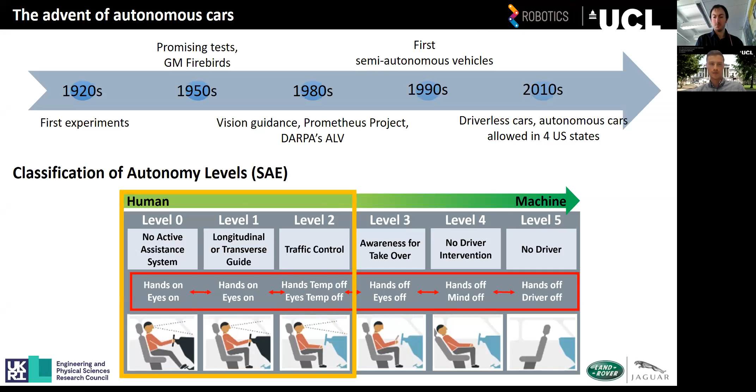First experiments involving autonomous vehicles began almost a century ago, and many predicted we would have fully autonomous cars on our streets by now—I'm referring to Rodney Brooks' plenary talk at ICRA 2020. Commercially available vehicles today have maximum level 2 autonomy, so the driver is required to take control occasionally between different levels of autonomy when needed to complete an end-to-end journey. These handovers between the car and driver cause safety concerns, as the driver might not be fully aware of the surrounding situation and the enabled autonomy features instantly, as recent incidents suggest.

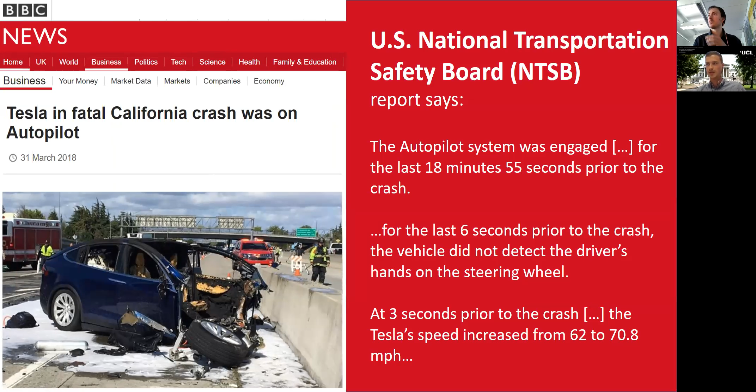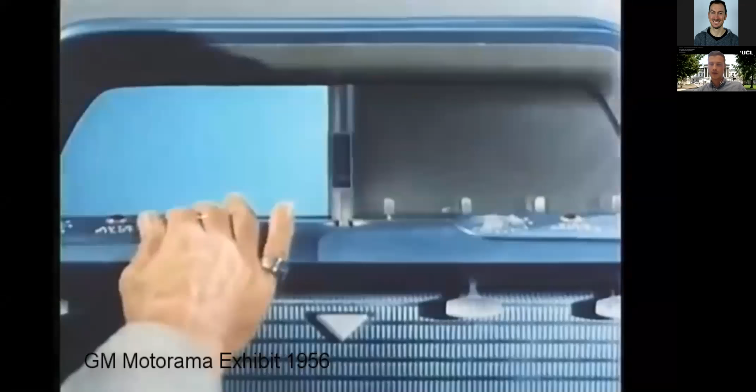We took inspiration from this video by General Motors from 1956. This was General Motors' vision on how the driver changes between manual control and full autonomy. Imagine that the man in the tower represents the artificial intelligence of the autonomous car here.

So the transition to the autonomy level is intuitive, human-centered, and safe. We propose a new interface designed for highly automated vehicles, measuring the situational awareness of the driver through physiological and behavioral sensors, giving appropriate feedback through a soft robotic driver seat acting as a co-pilot, and by that allowing safe, coordinated, and timely transitions between different levels of autonomy.

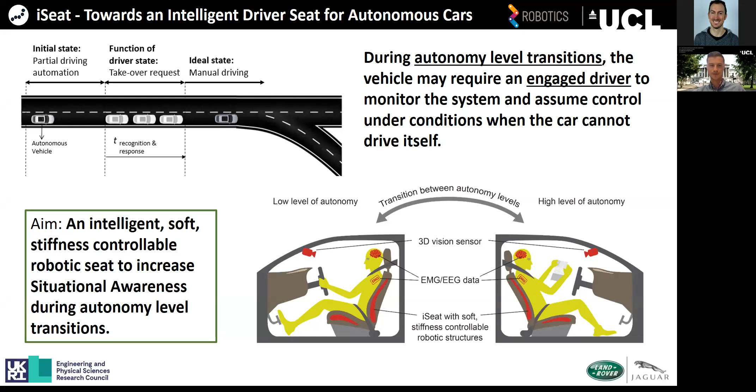An important aspect of the transition between autonomy levels is situational awareness—consolidating data into an understanding of the situation to achieve a safe and timely transition. Endsley differentiates the state of attention and defines situational awareness under 3 levels: perception, comprehension, and projection. Perception is about collecting critical data through the 5 senses. Comprehension is the traditional information processing, and projection is about prediction of future states of the decision-making process.

In order to measure situational awareness, we looked into identifying the correlation between situational awareness and EEG signals of the brain. The results demonstrate a positive correlation between the power spectrum of beta and gamma and situational awareness, as can be seen in the figure in the bottom right.

Beta is responsible for attention and alertness. Gamma is associated with cognitive functioning and information processing. As you can see in this figure, a strong activation of neurons in the left and right hemisphere is observed. These areas are responsible for vigilance and intuition, as well as logical and linear thinking.

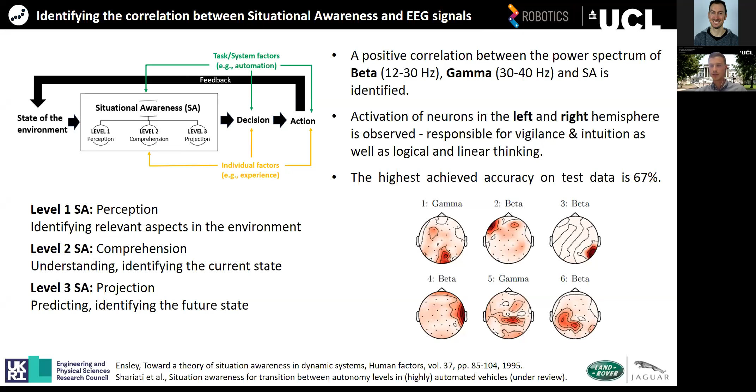To intuitively increase situational awareness, we are creating a soft robotic driver seat. This work includes the creation of a novel hybrid actuation system that allows simultaneous switching between pneumatic and hydraulic actuation to independently control position and stiffness of the seat.

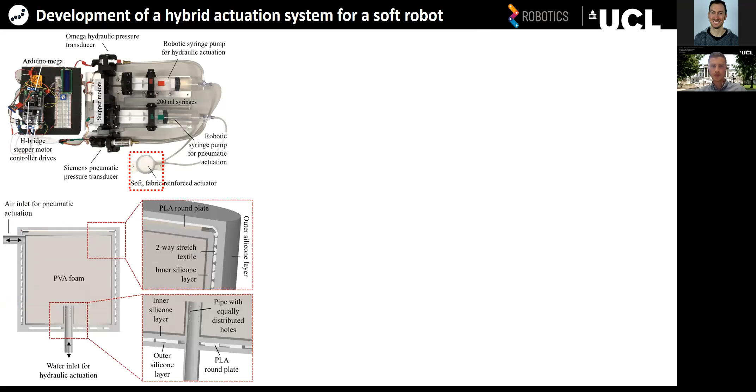I developed a soft robotic actuator with embedded pre-compressed foam and 2 inlets for water and air actuation. As you can see here, it is possible to either fully actuate the robot using water or air, a combination of both, or change the ratio of pneumatic and hydraulic actuation.

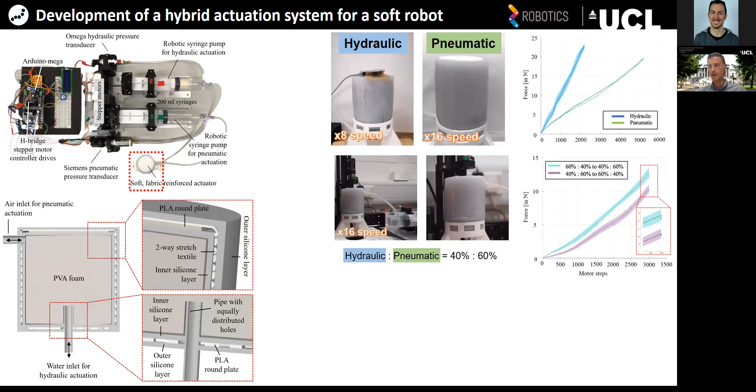Currently, we are integrating this work into a driver seat to prepare experiments in the Land Rover Jaguar driving simulator as soon as the situation at the moment lets us do that.

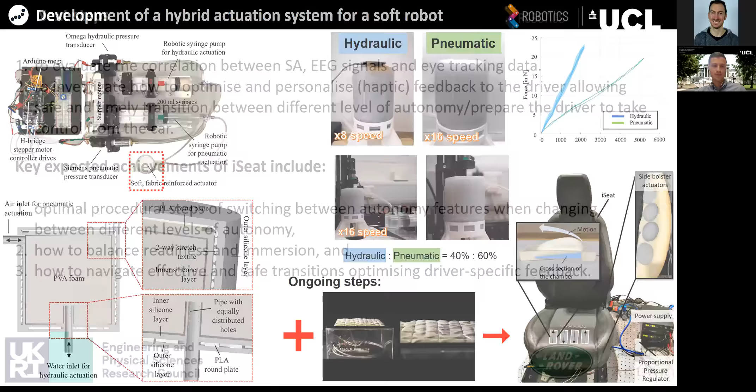Future work will explore how to detect situational awareness, the integration of more soft robots into our seat, and a number of experiments.

I'm Rahaf Rahal, and I'll be presenting our new method on haptic shared control for enhanced user comfort in robotic telemanipulation. Starting with the motivation behind our work, haptic shared control has been used a lot in the literature to share control of the system between a human and a robot component. It has been used, for example, to do different tasks such as guiding a user along a trajectory or to a desired point, or even away from undesired regions in the environment.

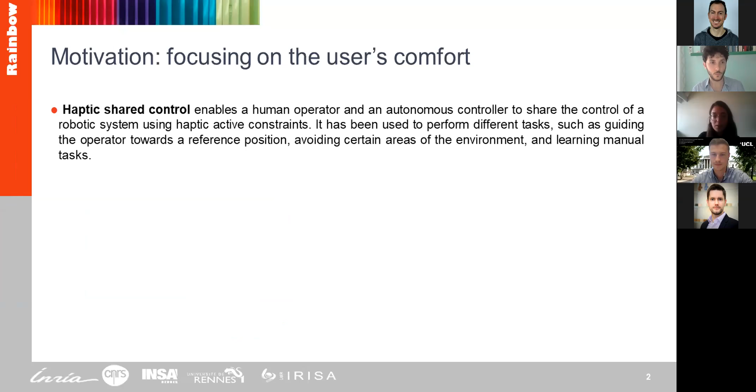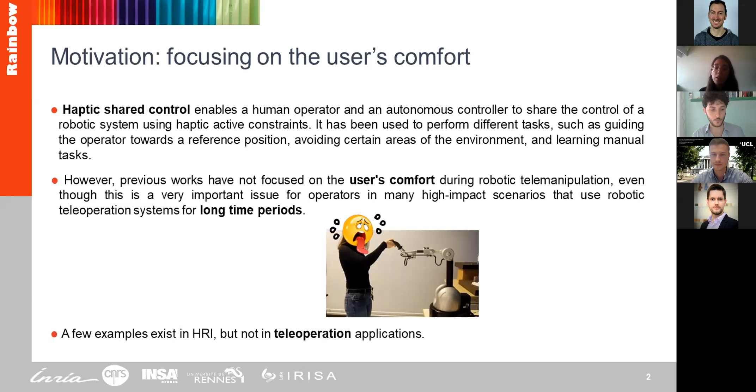However, none of the previous work focused on the user's comfort during telemanipulation, even though this is a very important issue in many applications that require long or repetitive tasks. A few works exist on the topic in the field of human-robot interaction, but not in teleoperation scenarios.

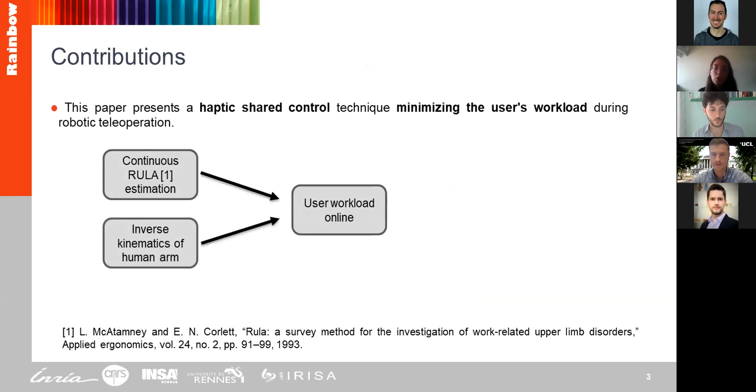Our main contribution in this paper is to present a haptic shared control technique that minimizes the user workload during robotic teleoperation. We start by devising a new online metric based on the RULA estimation, commonly used in ergonomics to estimate the human upper body's effort. Using this metric and an inverse kinematics implementation of the human arm, we can estimate the user workload online. This workload is then used, along with information about the task at hand, to generate haptic active constraints that guide the user towards accomplishing the task while minimizing the physical workload required.

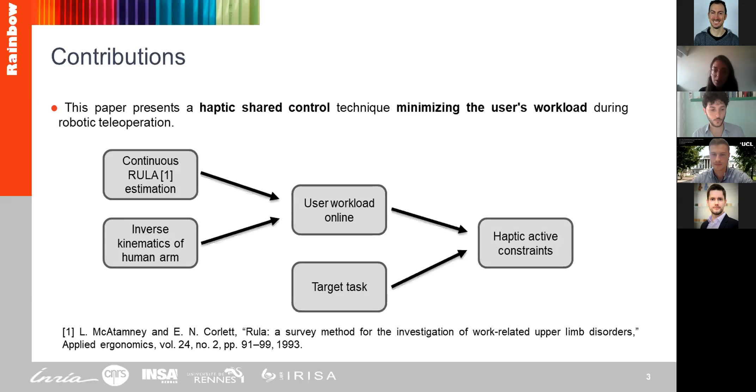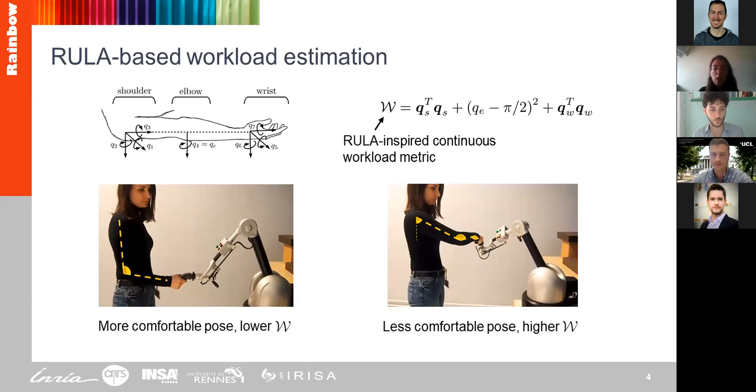To calculate the workload value in real time, we assume the user's shoulder is fixed, and that we know the pose of the wrist given the position of the master device. Using inverse kinematics, without any external sensor, we can estimate the arm angles and calculate the workload value, which is the deviation from the resting pose. For example, on the left you see a low value of W, comfortable for the user, and on the right, a less comfortable pose with a higher value of W.

The haptic feedback is designed as the weighted sum of two terms. The first, FW, minimizes the workload W. The second, FR, minimizes a task-related cost function—for example, the distance to the target or the deviation from a desired trajectory. In our work, we chose the distance to the target in a pick-and-place task as the representative cost function. Alpha and beta are weights designed depending on the task at hand; for example, for a long task requiring more user comfort, we can increase the value of alpha.

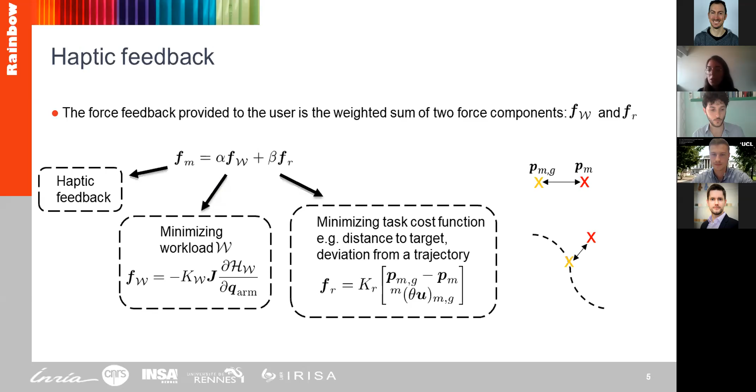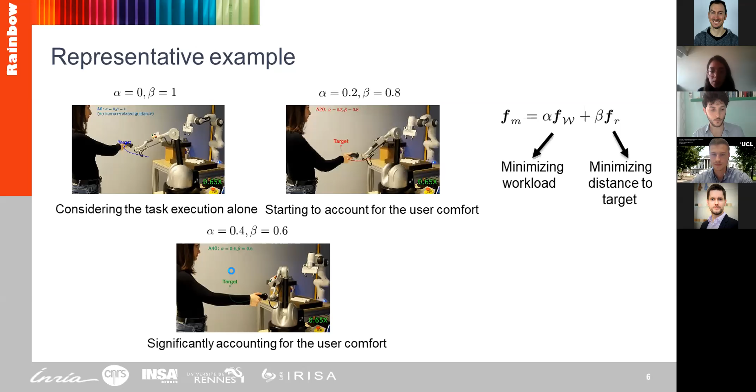I don't know why it's not playing. Okay, sorry about that.

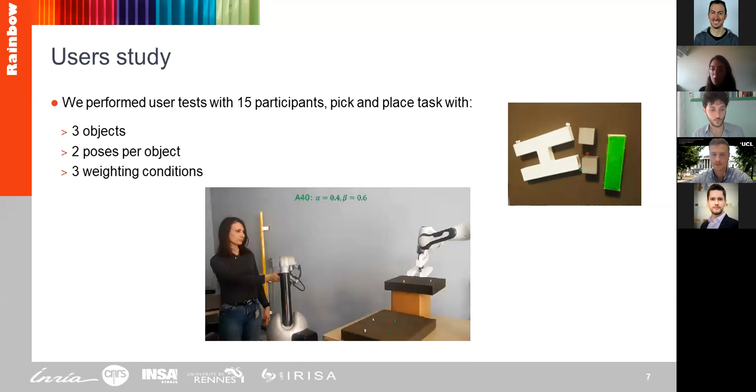The results showed that as we increase the human-related component in the haptic feedback, user comfort improves by 30%, as shown by the NASA TLX test results. But at the same time, we had a slight decrease in performance in terms of completion time and placing error.

As a summary, we presented a haptic shared control method that takes into consideration human comfort in robotic teleoperation, providing haptic feedback that accounts for both a human-related and a task-related cost function. Thank you for listening, and I'll be happy to take any questions.

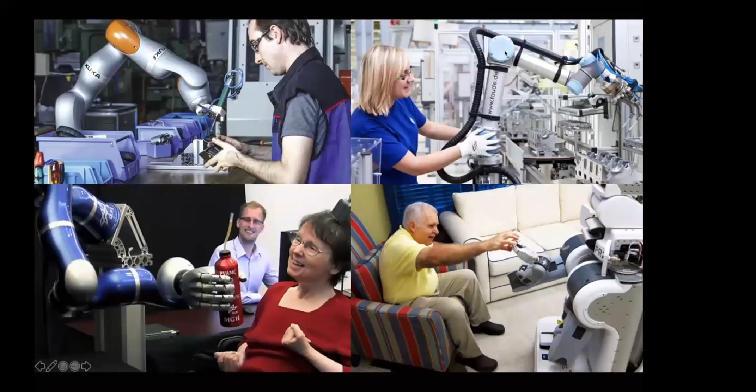Collaborative robots are designed to share workspace with humans, and they will physically interact with humans. Therefore, safety becomes a very important issue. We would like to develop safe and performant collaborative robots. Here we present a variable stiffness link to demonstrate this idea.

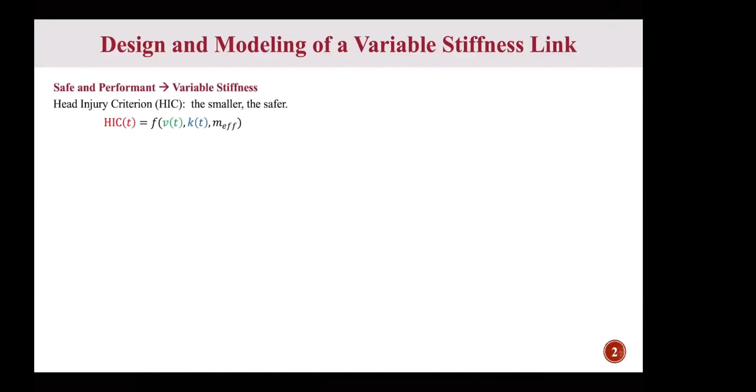We consider the head injury criterion to evaluate the potential impact results. The smaller the value, the safer. The HIC is affected by the impact velocity, the robot stiffness, and the effective mass of the robot.

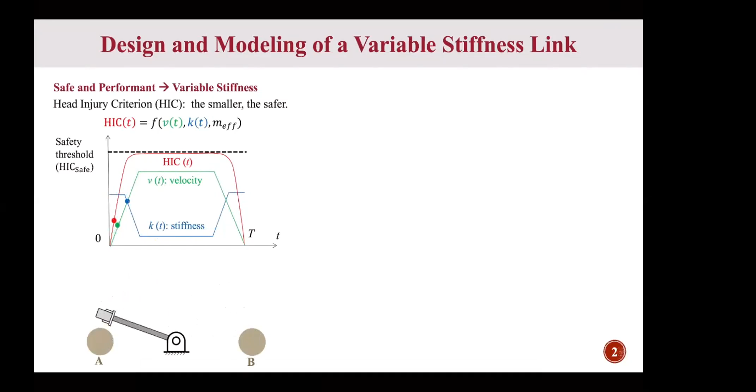Basically, we want to dynamically control the robot stiffness based on the robot velocity, such that the HIC value will be lower than a safety threshold.

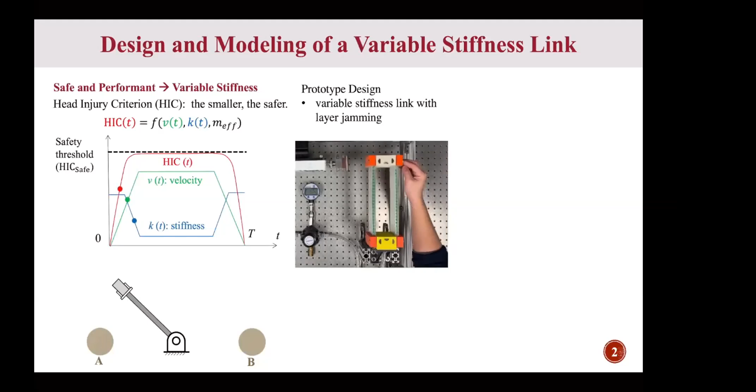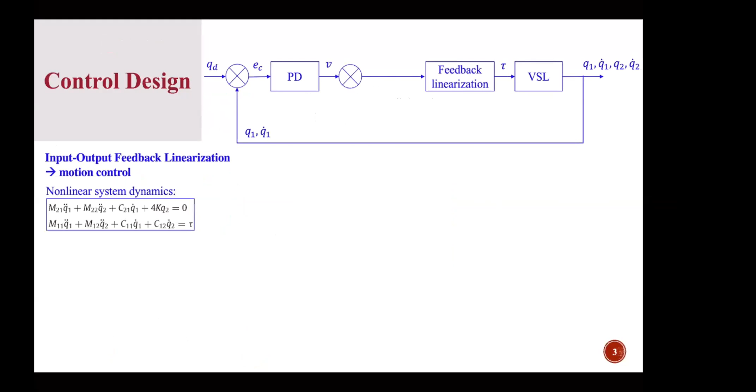We also developed a dynamic model of this link based on the pseudo-rigid body model. We developed a motion controller using input-output feedback linearization, and here is the nonlinear system dynamics based on the pseudo-rigid body model.

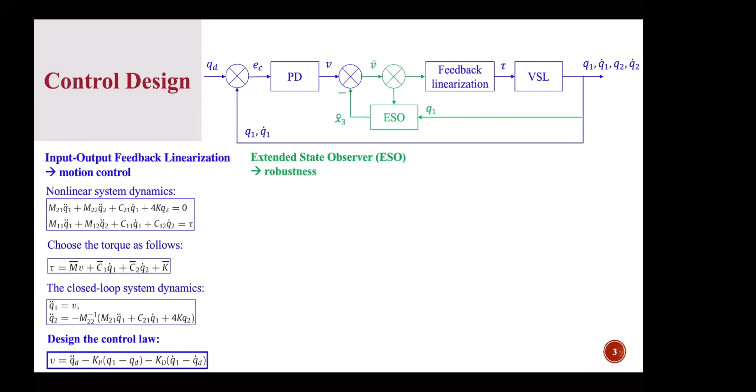To address the uncertainty, we propose to use the extended state observer. We extend the generalized disturbance to a new system state.

Then we can reformulate the output dynamics. To estimate the generalized disturbance, we design a linear ESO. Then we can update the control law.

Since this is a compliant link, we also need to address the vibration. We propose to use deflection feedback to address the vibration problem. We assume this is a singular perturbation problem.

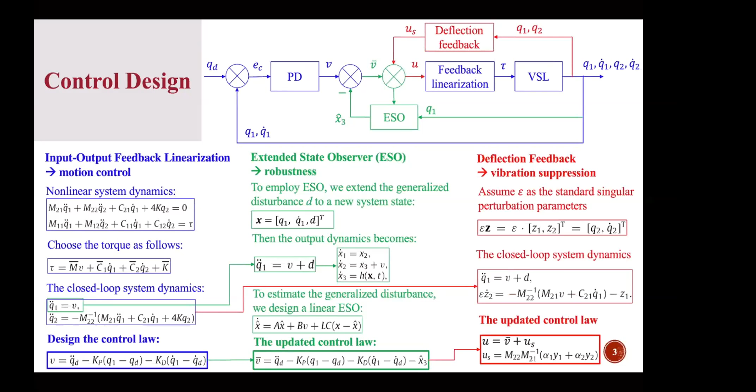Then we can reformulate the closed loop system dynamics, and then update the control law. The final control law will address the motion tracking, the robustness, and vibration suppression simultaneously.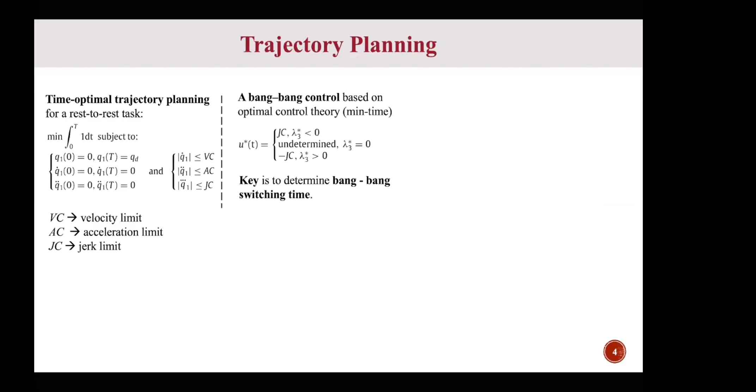We consider a rest-to-rest task for the trajectory planning problem. Here we want to minimize the time, and with these boundary conditions and constraints, it is a bang-bang control problem based on optimal control theory. The key is to determine the bang-bang switching time.

Different constraint combinations will yield four potential canonical profiles with an analytical solution of the acceleration and velocity. If we consider a particular case, we will know the boundary condition, and this boundary condition will determine which canonical form will be used for this particular case. Then we can integrate with these boundary conditions to offer an optimal trajectory.

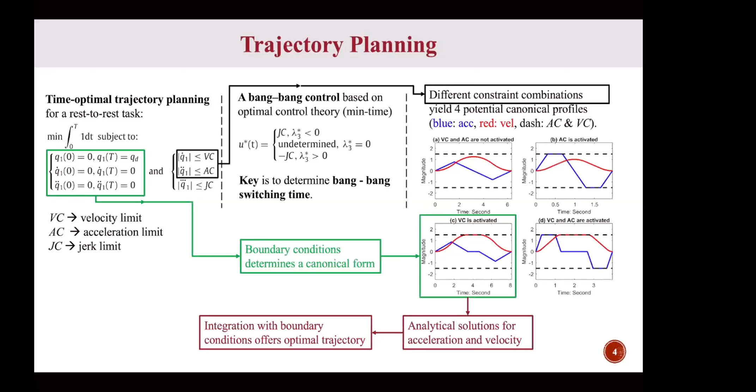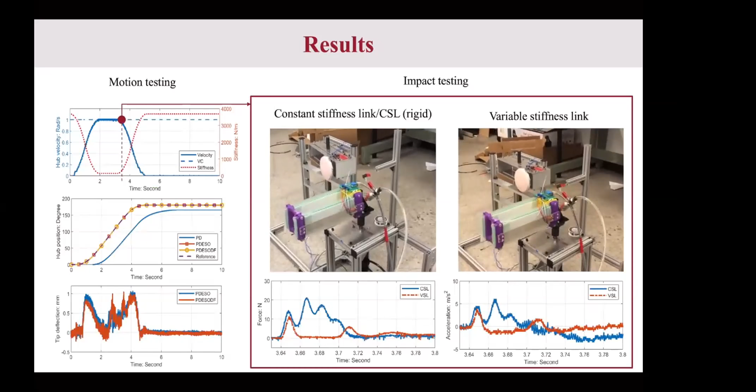For the impact testing, the left one shows the constant stiffness link, the right one shows the variable stiffness link. It turns out the variable stiffness link produces a smaller impact force and a smaller HIC value.

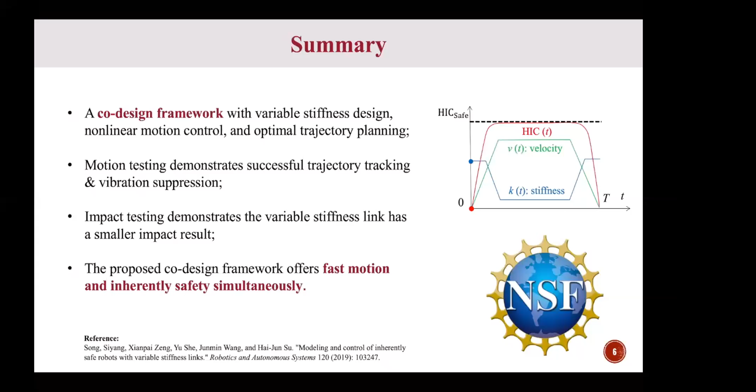To summarize, this work presents a co-design framework with variable stiffness design, nonlinear motion control, and optimal trajectory planning. The motion testing demonstrates successful trajectory tracking and vibration suppression. The impact testing demonstrated the variable stiffness link has a smaller impact result. This proposed co-design framework offers fast motion and inherent safety simultaneously. Thank you.

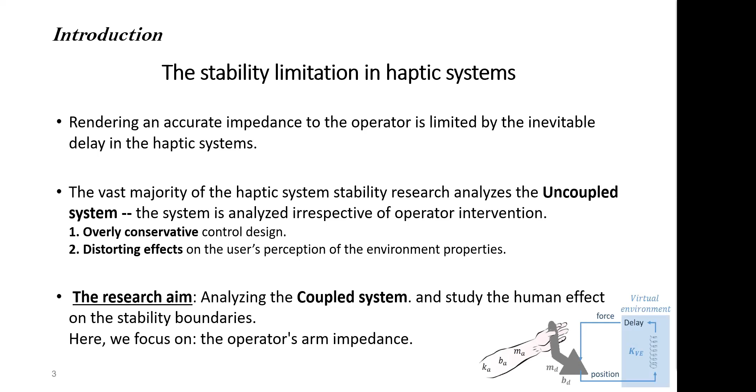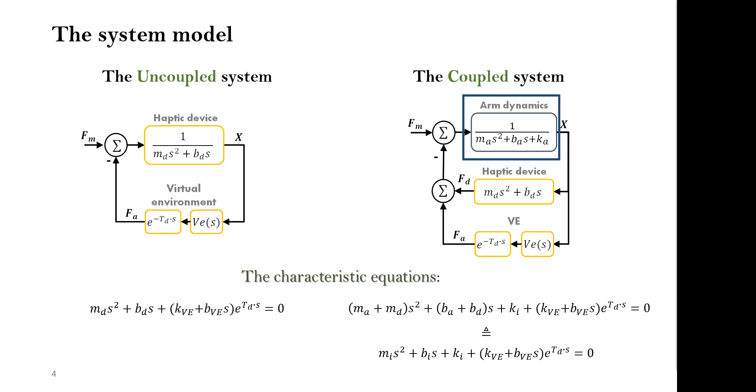The muscles produce force to move the arm, which is described by inertia, damper, and stiffness components. The arm holds the haptic device, and its movement is translated into movement in the virtual environment. As a result of this interaction, the haptic system applies forces back on the arm.

We analyze the stability boundaries using the frequency sweeping method, which reduces the tracking of an infinite number of roots to the tracking of only the rightmost roots.

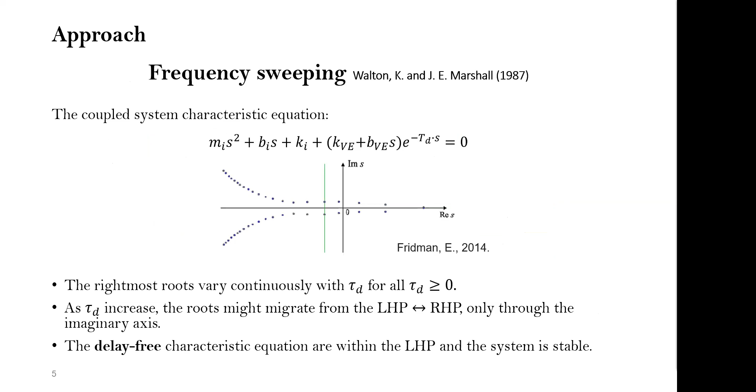The rightmost roots vary continuously with the increase of the delay. When the delay increases, the roots might migrate from the left half plane to the right half plane and vice versa, only through the imaginary axis. Note that because all the coefficients are positive, the two roots of the delay-free version are within the left half plane and the system is stable.

This leaves us with three optional stability conditions when the delay increases, depending on the number of crossover frequencies, which are the positive real solutions of the equation. When there are no positive real solutions, no imaginary axis crossing can take place for any delay, meaning the system is delay-independent stable. Where there is one positive real solution, the roots stay in the left half plane until a certain delay value, from which the roots cross to the right half plane.

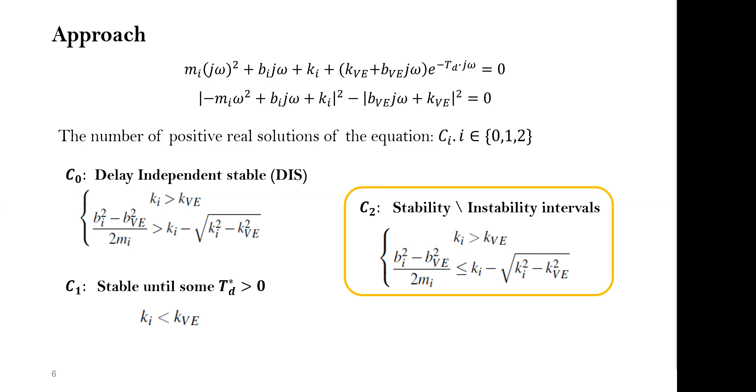And when there are double positive real solutions, the roots are in the left of the plane until some first crossing delay, but now they might cross again back to the left of the plane with a higher delay, meaning the system can become stable again within higher delays.

So we move to the results. Here we can see the stable delay boundaries of the uncoupled versus the coupled system, depending on the virtual stiffness, or in short, KVE. Since the arm's impedance is much higher than the haptic device impedance, the boundaries of the delay in the coupled system are much wider.

Moreover, we see that there is a range of KVE values for which the system is delay-independent stable, and also a range in which we get the possibility of stability and instability sequences. This means that, for example, for KVE equal to 270, the system stays stable until a delay of 100 milliseconds. But if the delay in our system is higher than that, let's say equal to 200 milliseconds, we might get an advantage from artificially increasing the delay in the system to a value somewhere between this range.

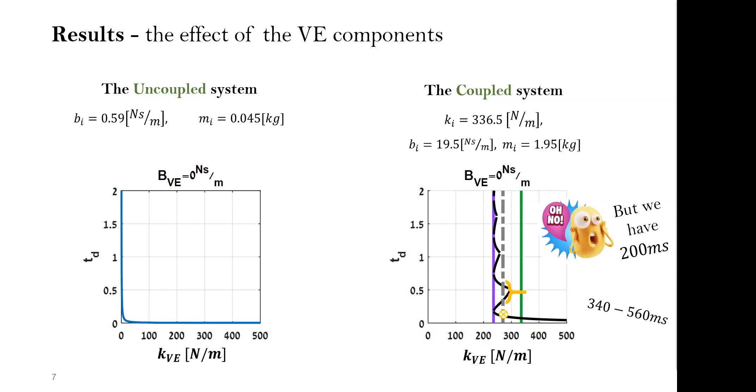Thus returning it to a stable regime. In addition, it is also worthwhile to understand the boundaries' dependency on each impedance component. So here, for example, we're examining how changes in the arm's damping and stiffness affect the first delay value at which the system becomes unstable. The more yellow the color, the greater the range of delay in which the roots do not cross the imaginary axis and become unstable. The white area represents the delay-independent stable regimes, and note that here we are assuming the mass of the arm equal to 2 kilograms.

We continue with this analysis examining the effect of other arm parameters. In the second and third graphs, we examine the effect of arm's mass and stiffness, and in the fourth graph, we examine the effect of the arm's damping and mass. From here, we can conclude that in the virtual damping-free case, in order to increase the range of stable delays, we prefer high stiffness and damping, but low mass.

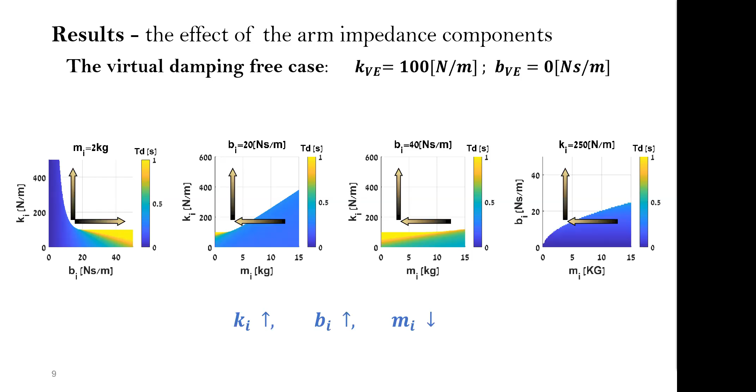When adding to the virtual environment a damping component, we will again prefer high damping of the arm, but our preference for the arm's mass and stiffness depends on the difference between the virtual damping versus the arm damping. So when the arm damping is lower than the virtual damping, we prefer low stiffness and high mass, and vice versa.

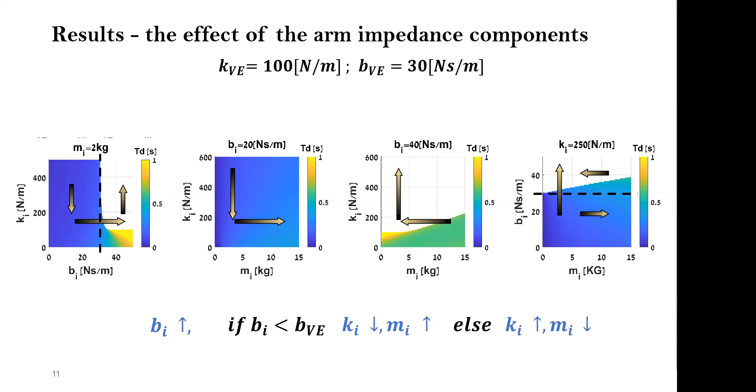And let's conclude. Analyzing the coupled system reveals much broader boundaries and reflects more truthfully the stability results found in the previous experiments. By analyzing the stability based on the frequency sweeping method, we could identify conditions where the haptic system could be delay-independent stable or could be stabilized by an artificial increase of the delay.

In addition, in environments known to us as soft environments, such as the soft tissue of the patient's body, the system can be stable even in the presence of high delays and with an operator with relatively low impedance values. So thank you for listening.

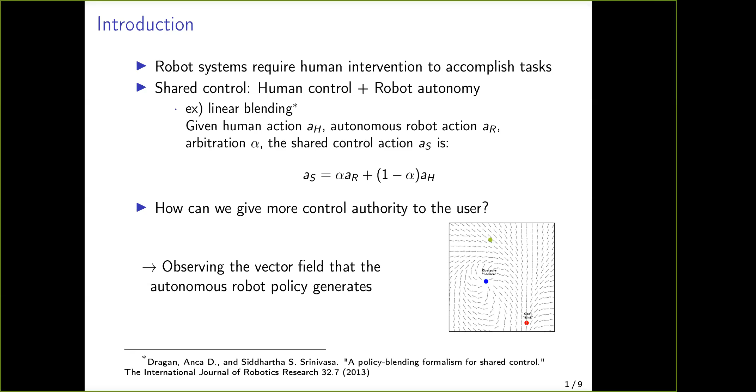We start by formulating shared control as an optimization problem. The shared control action is chosen to maximize the user's internal action value function while keeping a proximity condition that keeps the shared policy close to the autonomous policy.

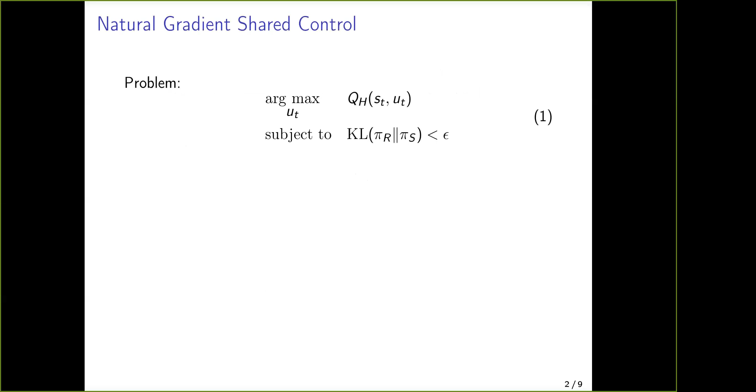We assume a linear approximation over the objective and quadratic approximation of the KL divergence. This leads to a new control paradigm for shared control using natural gradient ascent. The state of the shared control system is updated using the previous state plus the inverse Fisher matrix times the gradient of the action value function with respect to the state, scaled by the step size eta.

Modeling the user's internal action function is challenging. Thus, we utilize the user's action as an estimate of the gradient of the Q function.

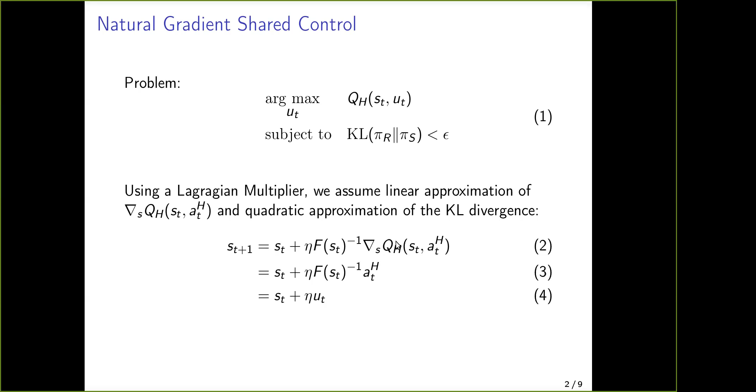Now, you might wonder how the Fisher information comes in. The Fisher information matrix, by definition, measures the expectation of the overall sensitivity of a probability distribution to changes of a parameter theta. The Fisher information is the second order derivative of the KL divergence, which emerges by solving the optimization problem using quadratic approximation.

In our setting, the Fisher matrix expresses the sensitivity of the policy probability distribution to small perturbations of the state. We estimate this to be the second order Hessian of the action value function.

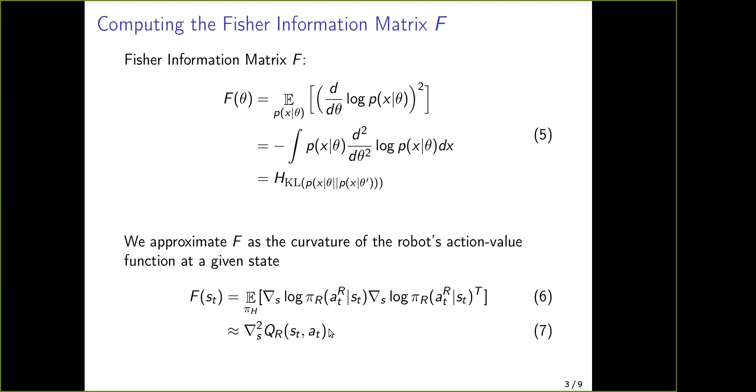As we consider actions as an approximation of the first derivative of the action value function, the Jacobians of the actions become the Hessian of the action value function. Thus, to compute the second order derivative of the action value function, we use the first order derivative of the actions using the finite difference method.

We represent the global robot policy using a neural network that can be regressed over the whole state. This can be easily queried using the trained network.

For a pick and place task, we display the ellipses represented using eigenvalues and eigenvectors of the inverse Fisher matrix. The ellipses represent the directions that the user action is stretched along. The user has more control authority over the system where the ellipses are more circular, and when the ellipses are stretched, the robot takes control.

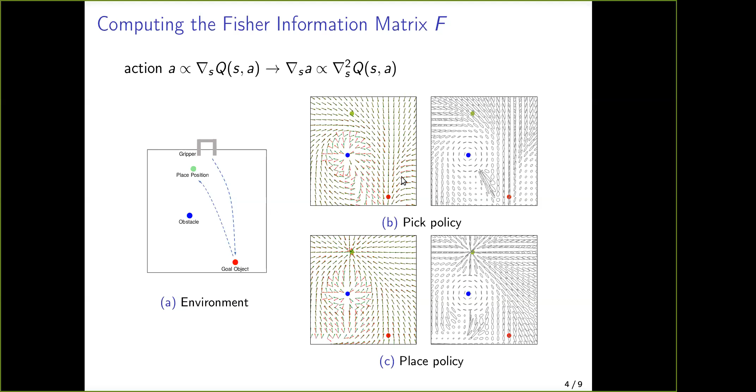We can provide different levels of assistance depending on the cost function that the robot policy optimizes. In the case of multiple goals, we compute the inverse Fisher matrix as a weighted sum over the beliefs. When the intent is not clear, for instance in these regions, the robot transfers the control authority to the user.

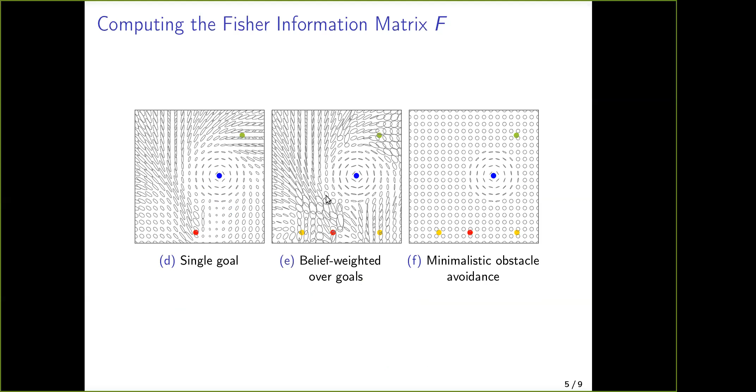We define a teleoperation task to assess the efficacy of our method, where the user controls the robot arm to perform pick and place tasks using the joystick. We hypothesize that our paradigm allows the user to take more control during the task while ensuring safety and efficiency.

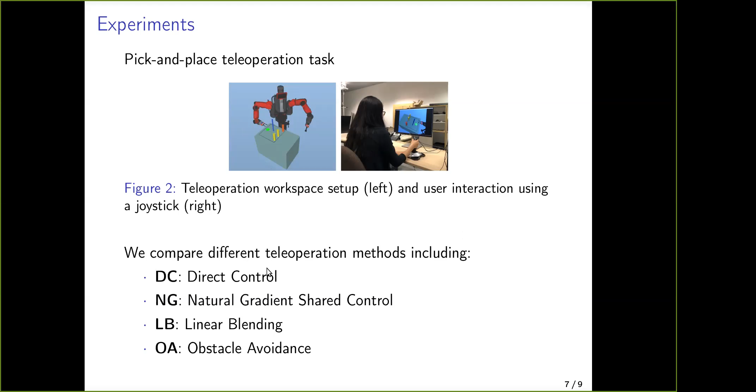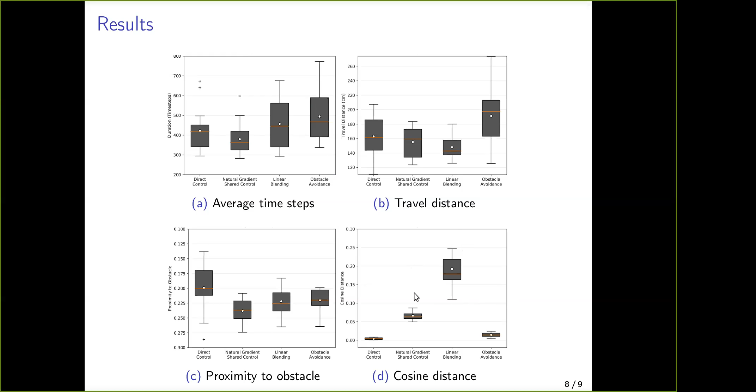We compare our method with different control methods including direct control and linear blending. Our preliminary results from 16 users show significant improvement over other control methods, and our method was still able to maintain user control while being compliant with user commands. This is shown especially when comparing the cosine distance between the user commands and the actual shared control commands.

We believe that our results are convincing towards a better user experience, and we plan to investigate more about this in our future work. Thank you very much for listening.

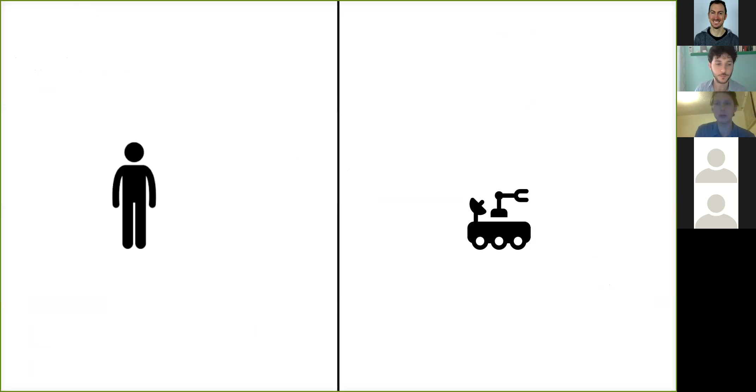To flesh out this idea, let's consider a user operating a robot remotely. The user is sending commands to the robot from some remote location here on the left, and the robot obeys those commands in its environment over on the right. Because the user is remote, they don't have access to the robot's environment directly. Instead, their knowledge of the environment is based on their perspective, given to them by some sort of control interface, represented here on the left.

So often this user perspective is going to be something like the video feed from a camera mounted on the robot. The user watches this video feed and makes decisions about what actions to take according to that.

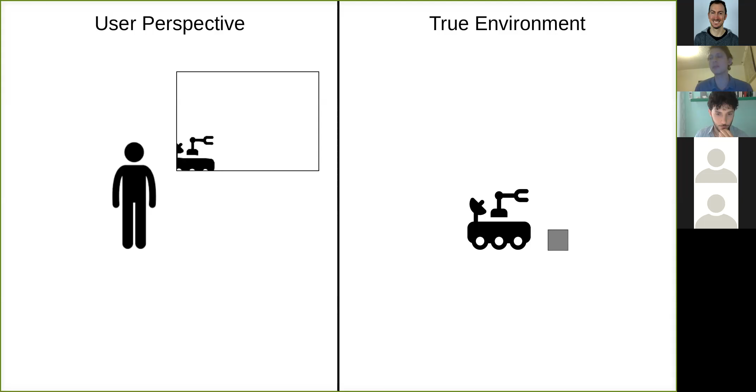However, what if there's limitations in what the user can see? What if there are obstacles that are outside the camera's field of view? In this case, we can see there's some sort of obstacle that's actually in the robot's path, but the user's not going to be able to see it from their perspective, from this camera feed. So the user might issue a command to just go forward to the robot here, not because they want the robot to hit the obstacle, but because their perspective is limiting their knowledge of the environment.

So the user may be providing bad commands, but more than that, the commands they provide are going to be bad in some systematic way because their perspective is limited in some systematic way. So we're going to use phi to represent this systematic error in their perspective. Phi is going to be a mapping from a true state to the state the user has knowledge of.

As an example, if we have something like limited perspective due to field of view, phi is going to take in an actual state, and for any obstacles outside the camera's field of view, there's going to be some uncertainty, or we're going to remove those obstacles for this phi-mapped version of that state. When the user provides their commands, they're not really providing them based on the real state. They're providing commands based on the phi-mapped version of the real state.

We're also going to use this notion of phi inverse, which maps back from the incorrect user perspective state to the real environment. This mapping is how we introduce knowledge that we have that the user doesn't, according to their perspective. For example, if the robot has knowledge about an obstacle outside the camera's field of view from some other sensor, phi inverse is going to take that user perspective state and add that obstacle back in.

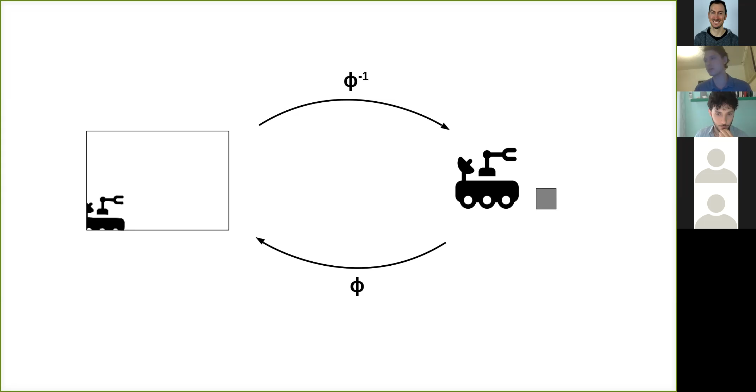So how do we use this information? The key insight is that instead of assuming that the user really wants us to just apply their most recent command in the real state, we can realize that the user's local goal is actually where we would go if we followed their action command from the phi-mapped version of the state.

So to think about this, if there's an obstacle in front of the robot, applying the command go forward in the real state would result in maybe the robot tipping over or crashing. But in the phi-mapped version of the state, without the obstacle, applying the command go forward just results in the robot moving forward. So the user's local goal, what we realize, is not actually for the robot to tip over, it's to go forward.

So then when we're considering how to reach this goal, we need to actually use phi inverse to map it back to states closer to the real environment. This is basically the real version, or the reachable version, of the user's goal, with obstacles and things like that added back in.

And then from here, we can use various search techniques to choose an action that's going to get us closest to this goal using different distance metrics.

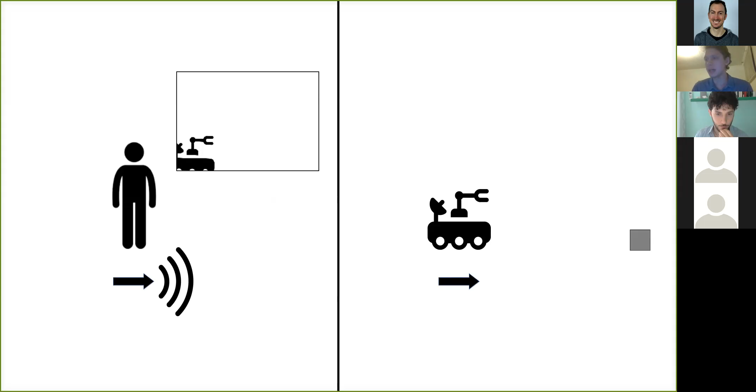The last thing I want to mention is that this approach only considers the immediate state and action. So we're also working on ways to use this knowledge of the user's perspective, phi, to plan ahead for situations in which the user's command is going to be bad. So if there's an obstacle far off that the user can't see, maybe we go ahead and start maneuvering away from it initially. This work is very much early in the algorithmic development stage.